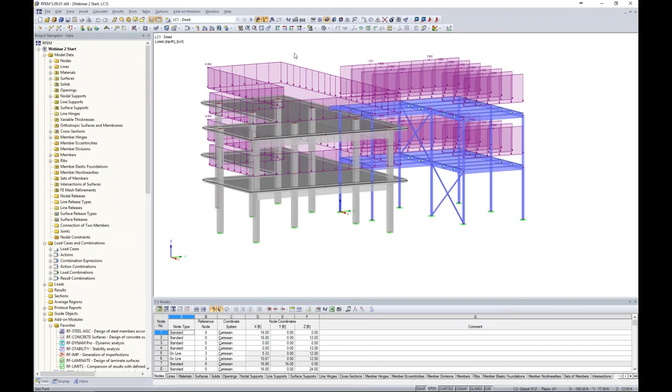Previously we loaded the structure, ran our load combinations, and got a full analysis. Now that isn't always the case. Sometimes we go to run an analysis after we have loaded our structure, and for example here we have loaded our structure with dead load. Previously everything ran great, but as we know with any finite element software, that doesn't always happen. So when we go to run this first load case, as we know from RFEM Webinar 1, this is running according to a linear analysis, and we immediately get an instability.

Instabilities are nothing new despite what program you're using, but I want to show you these features that make our lives a little bit easier within RFEM. The first thing to know is the text about the specific instability. It says this model is unstable. The instability is found at FE node number 64, direction Z. So it immediately gives me a location and tells me that there's some type of issue in the global vertical direction.

The model is statically underdetermined. So when I close out of this error message, you'll see that my big red arrow shows me exactly where FE node number 64 occurs.

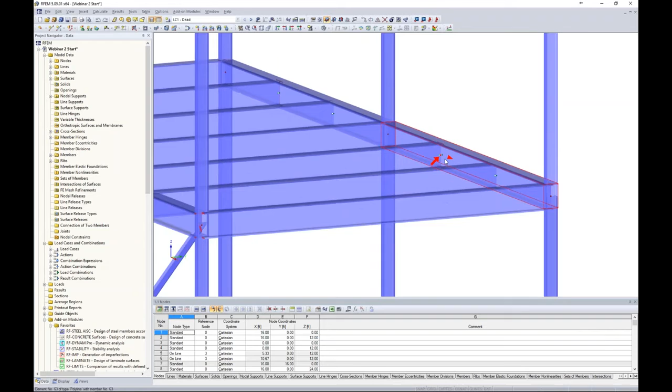Now, I'm not going to say that 100% of the time this big red arrow is going to point out our issue, but a lot of the time this really is where the issue is occurring. So when I scroll in here, I really don't see anything immediately. When I turn it to a wireframe model, okay, well, I can zoom in here and see that I forgot to connect my node here of my beam to my transverse beam.

Well, that's no problem at all. I can just easily drag and drop that to connect those two members. So you can imagine that when we have a huge model with a lot of members and we get this error message for an instability, that red arrow is a huge benefit to really narrow down on where that issue is occurring, rather than it being like hunting for a needle in a haystack, trying to determine maybe if a node isn't connected someplace.

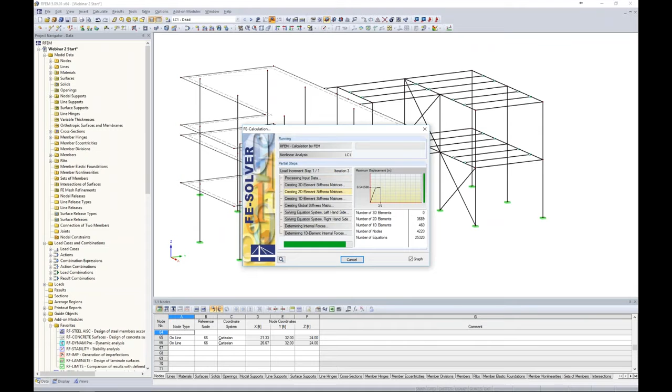So now we can go and run our load combination again, or this particular load case. We run it, and everything appears to run okay this time. We immediately get our deflections here, which we can decrease the deformation factor.

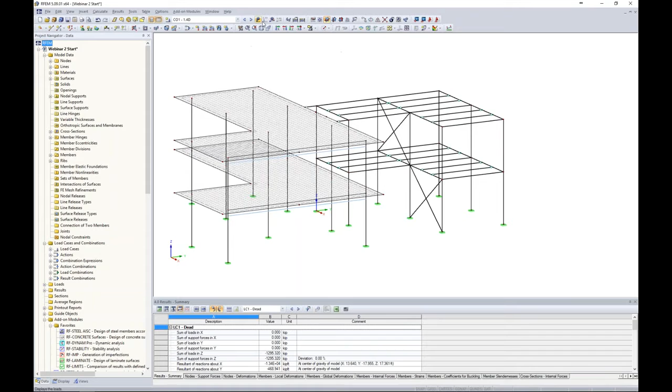So that's great, but now we need to run our first load combination, 1.4 dead load. This is just a load combination from ASCE 7. I take a look at my applied loads - it's applying that 1.4 factor to all of my dead loads, our surface loads and line loads here. Maybe turning this back into the rendered view, I begin my first load combination analysis.

And lo and behold, we get another error message. So it's another instability, but this time our text is a little bit different. It says our model is unstable and the instability is found at this location, direction X. So we have a little bit of a different direction that it's being affected now.

But this says a specified load is greater than the critical load. So this tells me that at this particular location I probably have some type of issue with buckling, because the specified load is greater than the critical load.

Well, I can close out of this error message and zoom into this big red arrow here. Maybe I turn this into wireframe. I see that everything is connecting fine, so I don't really understand where this error message could be coming from.

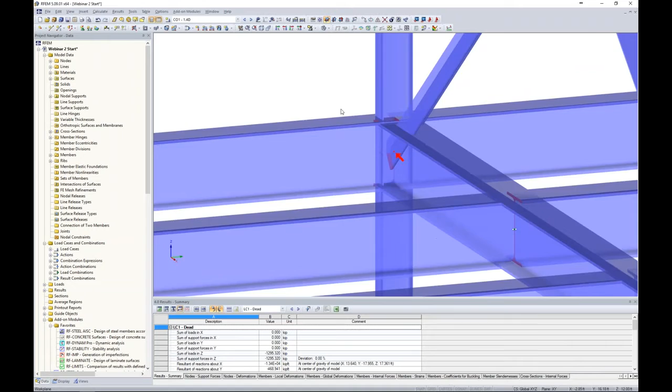Well, this is where we can utilize our add-on module, RF Stability. So from our long list of add-on modules over here on the left in our project navigator, we can launch RF Stability. As you can see, this is just a simple dialog box that pops up within the program, and it allows us to do an eigenvalue analysis for a few different eigenvalues based on the buckling behavior of our structure.

And what we can do is import different axial forces from either load cases or combinations. Now, because I was able to solve for my first load case, dead load, just fine, it makes sense to import in those axial loads to see how the structure is behaving based on those applied axial forces.

Now, we have quite a few other settings here that I won't get into in too much detail, but we do have an option down here that I can calculate an eigenvector for an unstable model. So this is if I couldn't get the model to solve at all, so that the causes of the instability can be checked graphically. This is a feature too if we couldn't even get our dead load to solve.

Now for this, I will run the calculation, and it quickly runs the different 4 eigenvalues. And I'll now see my results available in my tables here. So you'll see I have 2 different columns - the first is the critical load factor.

Now the critical load factor is just a factor that I can multiply that applied dead load by before I'm going to see the associated buckling behavior. We have 4 different eigenvalues, so the critical load factors are listed here in ascending order. So probably our most important one would be this first eigenvalue.

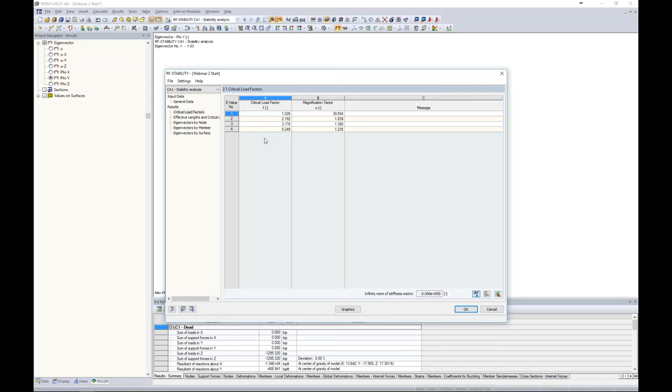So if I take a look at my graphics, you can see we're still in this add-on module RF Stability. We can see that with our drop-down box here, and I have my 4 different eigenvectors. Looking at the first eigenvector, we can see the buckling behavior of this structure.

Remember, I can only multiply my dead loads by 1.03 before I'm seeing this type of behavior. If I take a look at the other eigenvectors, same type of behavior. It all has to do with these slender columns here. So you can imagine that when I multiply my dead load by 1.03, I see this buckling behavior. So when I'm trying to run 1.4 times my dead load, that's where our instability is coming from. These members simply can't handle the applied loads.

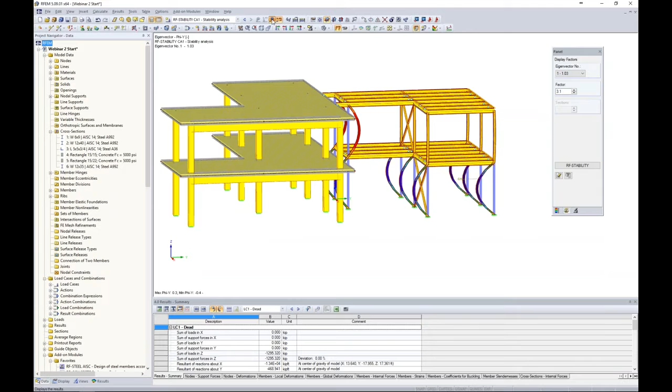So back under my data tab, at the very top is all of my input data. I can take a look at my cross sections, for example, maybe turn off my results here from RF Stability. I click on my first cross section defined. It's a W6x9, that's a very small number. So perhaps I want to increase that to something a little bit larger.

Well, I can just right click and edit all of these cross sections at once because they are assigned to a single cross section within the program. Open up my cross-section database, and here are all of my AISC shapes. So we would like to choose something more like a W10x49, much bigger than a 6x9. Still A992 is okay, but obviously we're going to have a bigger cross-section here. So I click OK, and it's asking me to clear my results.

So now when we go to run our 1.4 dead load, run the analysis, everything should run fine because now we have a little bit more of a sturdier member there and we don't see that same buckling behavior. So you can see how RF Stability is extremely useful, not just if you have an instability, but if you want to see the different buckling modes of your structure. I did a few other webinars where I utilized RF Stability to export as imperfections as well.

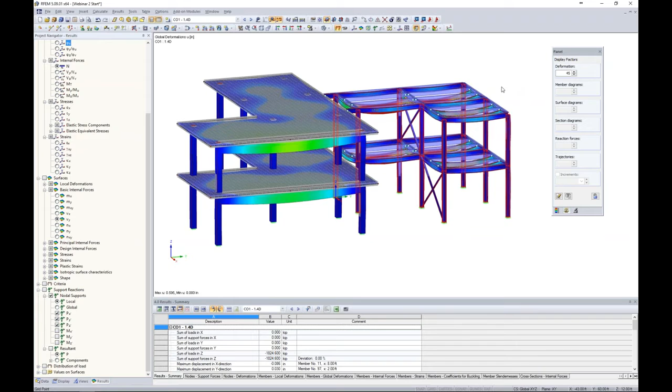Okay, so now that we have addressed instabilities, I'd like to move on to singularities. And the first thing to do is to turn off our results, and let's take a look at our top surface here of our concrete structure.

So if I drag my selection toolbar or selection box over that top surface, I can use my drop-down box here to create a visibility by selected objects. Now you can always right-click and show the hidden objects in the background if you'd like, or you can right-click and turn that off so that we get a clean view of only our structure that we've selected.

Under Views, I can create a new visibility, and we'll call this Top Slab. I click OK, so now I have this user-defined view under Views that I can always refer to despite whatever view I'm currently in. So this is the case when we go to show the hidden objects in the background.

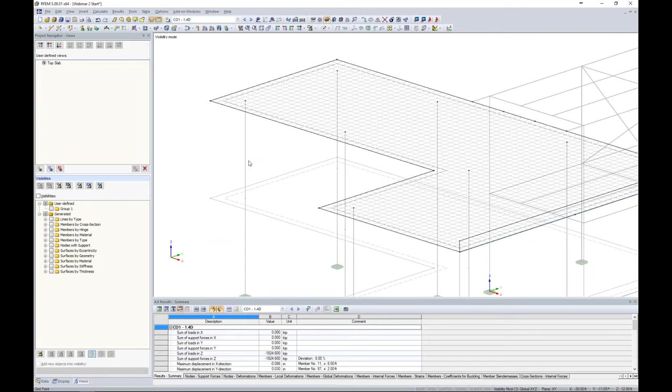And we show a wireframe view, that members are always 1D elements in a finite element software. Now our surfaces are 2D elements. But the problem is that where we intersect this column to the 2D surface, you can see here that the intersection occurs at this teeny tiny FE mesh element right here, the single node point. So we can imagine that all of our force transfer is occurring at this single point.

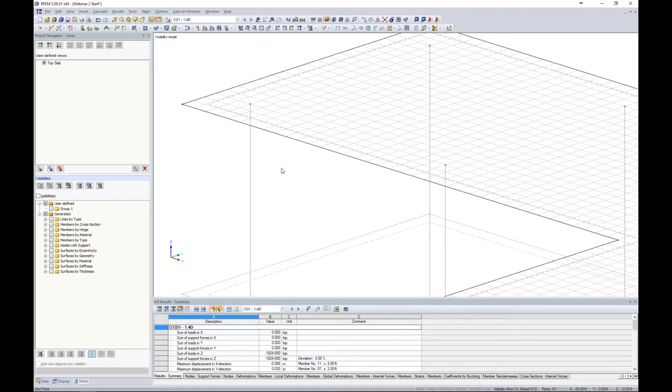So inevitably we're going to get very high stresses, very high forces. If we go to do design of this concrete slab, we're going to get high reinforcement simply because it's a product of the high internal forces at this location. Now in reality, when we render this, these columns are 15 inches by 15 inches, so we are going to get some load distribution. And like I said, this is not just for our program RFEM, this is common in any finite element software. So what tools do we have available in RFEM to help us address this so that we are not overly designing our structure?

Well, the first thing, and what I'm going to do, is to jump to a different model here that I have saved, and I have went ahead and used our add-on module RF Concrete Surfaces to do my reinforcement design. Now I have an entire hour-long webinar dedicated to just surface design using this add-on module, so we won't get into it today. But again, if you are interested in how we can do reinforcement design for this, refer to that YouTube video.

So once we run our analysis in RF concrete surfaces to get design per the ACI, we have our different required reinforcement. The first is AS1 at the top. Now judging by this red arrow, we can see the reinforcement direction, and you'll notice that where these columns are framing into the slab, we have high reinforcement given there. The same goes for AS2 in the other direction.

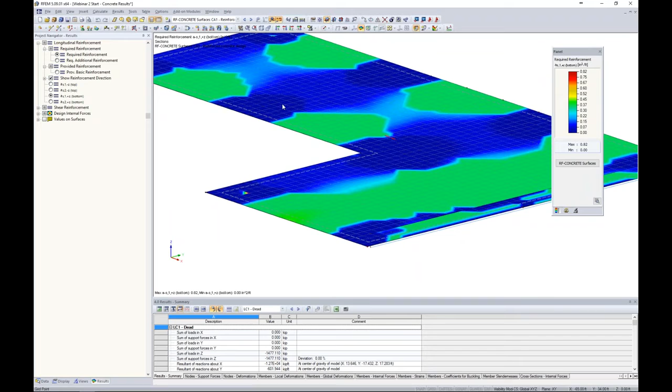Now when we're looking at AS1 at the bottom, it's not the same, which makes sense. We have a lot of bending at the bottom of our slab between our columns, so that's where most of our bottom reinforcement is going to be. Same with AS2 at the bottom in the other direction.

Now focusing on AS1 top for our slab with this particular reinforcement design, this is nice in terms of our contours, but perhaps we'd like to see this in a more numerical value. Well, we can do so with sections, and what we will do with our first section is up here in our dropdown, we can create a new section numerically. But before I do that, right next to it, we have the option to completely turn off our ISO lines. So these results will still be available, but I'm just simply turning off those ISO lines for the sake of making my section cut right down through the center of my slab.

So a section is exactly what you would think of it. It's going to give me the internal forces or my results at that particular location. So we can create this section numerically.

Now the first thing I need to do is to give it a section name, section 1. It will be a section cut through my surface, and I can apply this to my single surface number 2 here by clicking on that graphically.

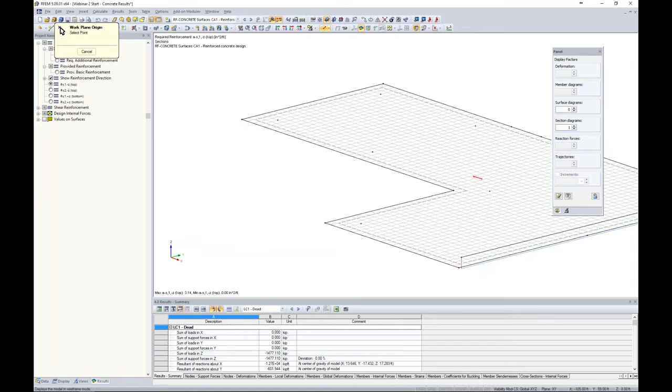The next thing to define is my start and end points for the section. So what I like to do is maybe turn on my drawing grid down here, and I can activate that down at the bottom, change my origin for my drawing grid, and I can choose my 2 points here by zooming in, and I want it right down that column line. So my second point will just be located at the second end of my slab, and because of those AutoCAD-like features, the program does a great job of just snapping to those points that I most likely would want to place my section.

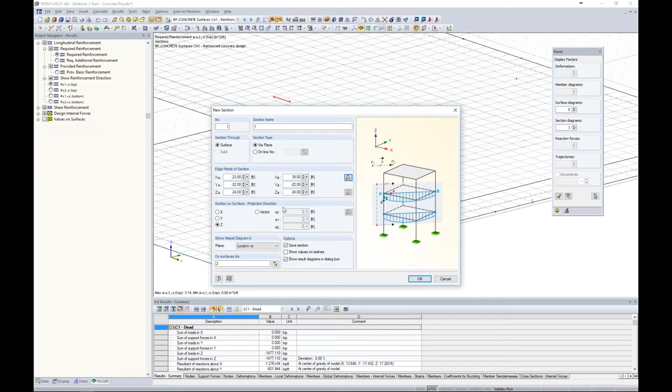Now the section on surface, the projection direction, we can have it in the global X, Y, or Z orientation, or we can define our own vector if we want it at some type of angle.

Once I click OK, then it immediately brings me into the results diagram for my section, and you'll see our exact same results that we were viewing in RFEM, and in particular, we take a look at our reinforcement design per RF concrete surfaces. Here are those spikes in reinforcement where our columns are framing into our surface. I think we can easily say that this is being over-designed for those internal forces.

Now I can always exit out of here and view these surfaces, as you can see graphically on my surface as well. So going back to the results diagram by right-clicking, I want to show you guys a useful feature called smoothing ranges. So up at the top is the option to edit our smoothing ranges.

Now my first column occurs 3 feet from the edge of the slab. My second column occurs at 20 feet from the edge of the slab, and my third at 41 feet. So what I'd like to do is smooth out the range, maybe 1 foot on either side of the column for a 2-foot range there. So this is to account for the load distribution that's occurring when in reality the program's not accounting for that.

So what we can do is define our different ranges. For example, for our first column, the beginning will be 2 feet and the end will be 4 feet. The program automatically calculates the length as a total of 2 feet for that first smoothing range. The second will be from 19 feet to 21 feet. And lastly, for our third column, it will be from 40 to 42 feet.

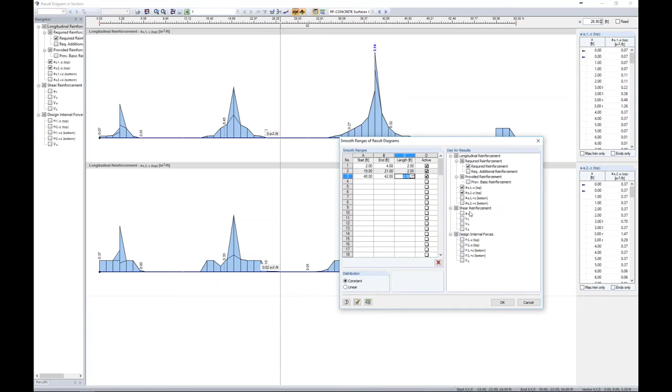The program automatically assumes that we'd like to apply these smoothing ranges to what we're currently looking at, but we can always activate and deactivate different results available here. So now when I click OK, you can see the smoothing range applied.

For example, column number 3, we went from 3.14 inches squared per foot to 1.65 inches squared per foot. So this is extremely useful in the sense that we can print this to our printout report.

We can even use this drop-down box here and pull up one of our other load combinations. I'm going to clear out all of these result diagrams and just activate my MX and MY. Again, we're seeing those spikes in internal forces here. I can go back to my smoothing ranges and simply activate the checkbox for MX and MY for all 3 of these ranges, so now when I click OK, you're going to see the smoothing range applied here as well.

Now, one thing to note, if we jump back to RF Concrete Surfaces, for example, the smoothing ranges are shown here, but if I were to exit out, they are not shown graphically here within the model.

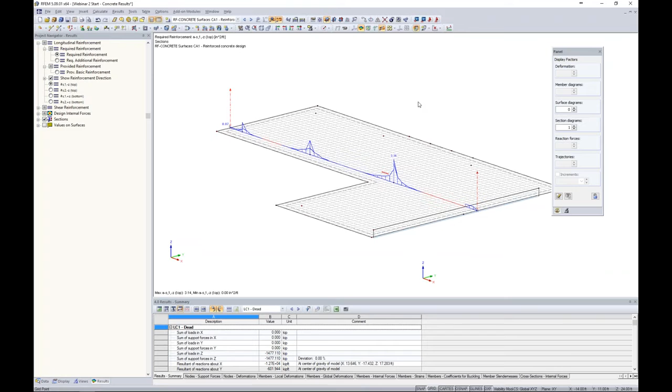So the question is, well, that's great, but how can we apply this so that the program actually designs for those average forces, rather than us just putting a fictitious number after our results are shown in the smoothing ranges? And one thing I forgot to mention, if we take this section cut and we highlight it, hold down our control key, maybe we want to copy it down this other column line just to give us some perspective on some high design forces at this location.

So smoothing ranges are great, but if we go back to our Data tab, we will see these sections available here. We have section 1 that we just created, and then here's our second copied section. There's another feature called average regions.

So if I right click, I can create a new average region. Now for this, we want to apply it to a particular surface, so I graphically select surface number 2 here. You'll notice that I have 3 different forms that I can select for my average region: a rectangle, a circle, or an ellipse. For our particular case, our columns are rectangular in shape, so it's probably most beneficial to use a rectangular averaging region. But maybe you have a circular column framing into this slab, so that can be utilized as well.

The next thing we want to do is to define where we want to apply the center of the averaging region. We'll apply it to our first column here. The dimensions, if we want to average it out over a 2-foot section again, for both our A and B dimensions shown in this picture, we can.

Now you have a lot of control on what internal forces you exactly want to average. The program assumes that for the local axes of our average region, U and V, we want to correlate those with the X and Y local axes of our surface. But in reality, we can activate all 4 of these if we just want to average out everything together, independent of what our local axes are doing. Or if we're interested in maybe just averaging out our moments, but not our shear and axial forces, we can individually apply those as well.

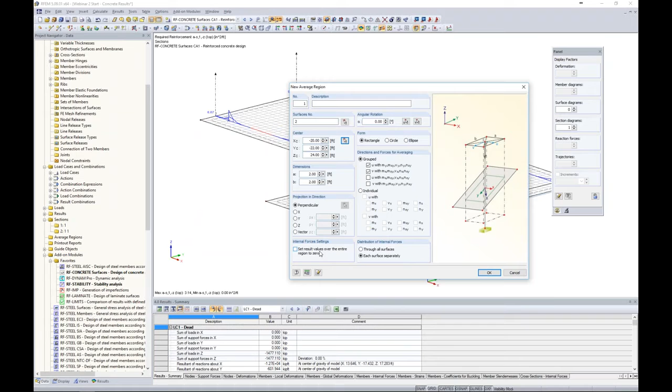The internal force settings - you even have the ability to set all the result values over the entire region to 0. This might be beneficial if we're checking punching shear for a column and we're really interested in the shear at the critical shear section, and we don't want to design for anything within that critical shear section.

So if we click OK, then we will get our first average region. Now, to make this very clear what we're doing, I'm going to jump to one of these particular load combinations, and under my results, I'm going to activate my sections. So we're still viewing our sections here, but for my MX forces - this isn't my concrete design now, this is my internal forces MX.

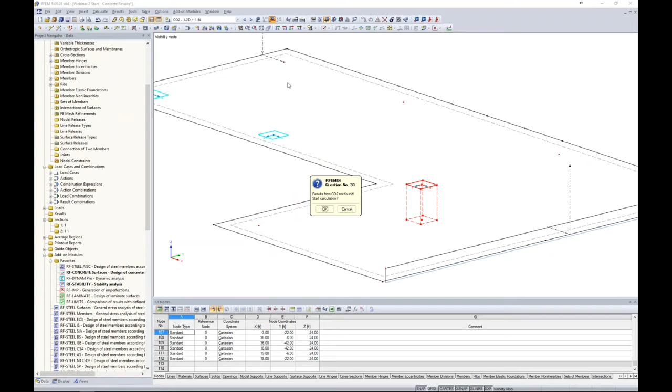Now with this average region, all I have to do is select it, hold down my control key, and then I can take it, drag it, and drop it. It's asking me to clear my results, that's fine, and I drag and drop it to some other regions here. Now I can rerun that same load combination rather quickly here, and we will see that average region now applied. Previously this was something like 83 kips per foot, so you can understand that this is now going to give us less internal forces.

Now if we jump back to RF concrete surfaces, it looks like we lost our results here, so I'll quickly rerun that. All this is doing is applying the ultimate limit state designs for all of my load combinations to do my reinforcement design. But what I want to show you with these average regions is that my AS1 top is still showing 3.16 inches squared per foot, so this average region did absolutely nothing to help us with that.

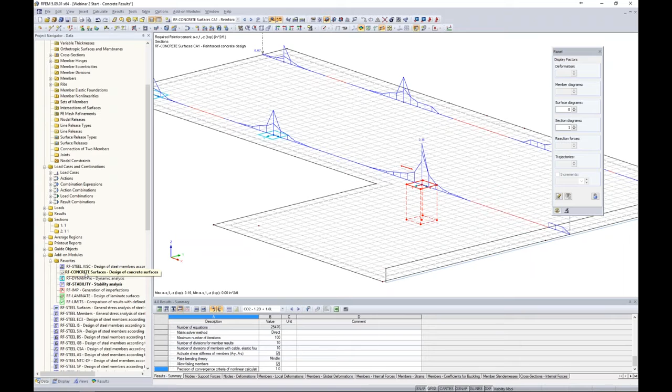So why is that? Well, back under the Data tab, under the Concrete Surfaces add-on module. Again, if you want a more detailed look into this particular add-on module, refer to our previously recorded webinar. But to let you know, when you are using average regions for concrete design, under the Details tab, it is default to have this option checked off.

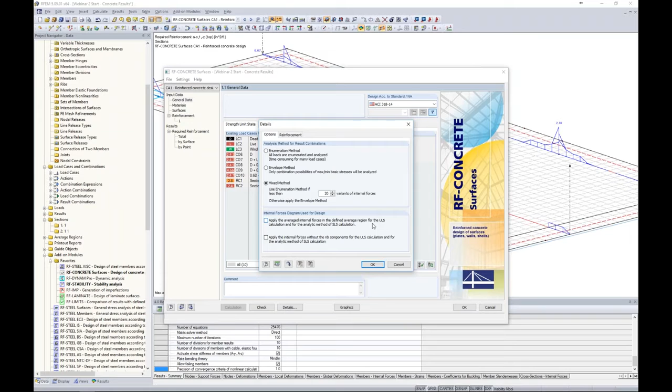What we'd like to do is apply the average internal forces for our ultimate and serviceability limit state designs, so now we check this checkbox. I click OK, I click OK. We've lost our results again, but we can easily run a quick analysis, which solves rather quickly, because now it's taking those average internal forces to give us our reinforcement design. So now we have gone from 3.14 to 1.83. This is how we can apply average regions to address singularities within the program, especially for something like concrete design.

Okay, so that is what I wanted to look at in terms of singularities. Now, switching topics, I'm going to cancel my visibility mode here and render my model.

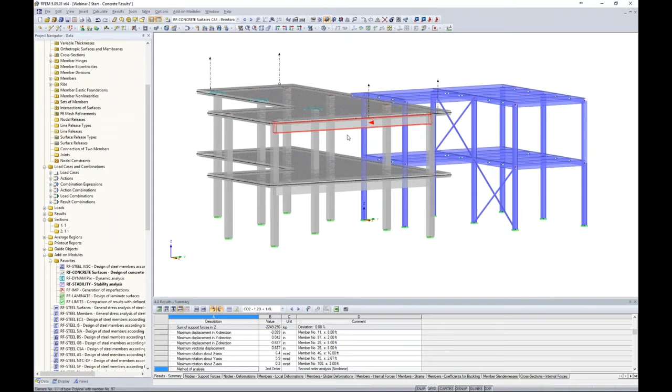In RFEM Webinar 1, if you remember, we created this beam member here, and it's actually a rib because we wanted to span from this column to this column, but we didn't have an intermediate column, so we thought it'd be best to apply a rib member there. If I double click on this rib member, you can see the member type is set to that. Previously we had defined effective widths for this rib member to take that into account for analysis, but also designed for our reinforcement per the ACI.

Now let's say we have a situation where we actually have a precast element, and the precast slab is sitting on this precast beam, and it's not a monolithic pour like what we'd see with a rib type member. In reality, I want to fully release the moment. Maybe I still have resistance for my lateral movement and of course my vertical movement, so X, Y, and Z is fixed, but no moment will be transferred between the two.

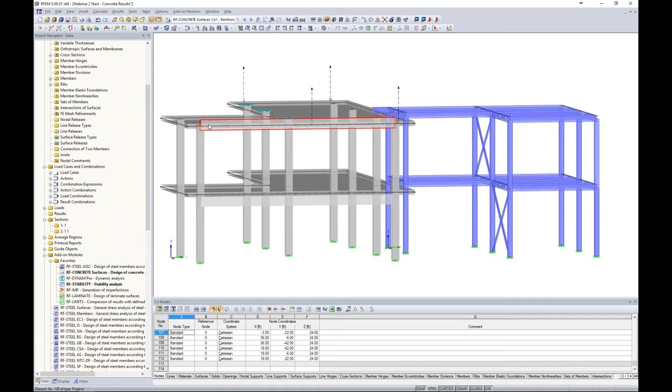So what I'd like to do is not have this set as a rib, but set this to a beam member. When I click OK and it's asking me to clear my results, I take a look. My typical member is modeled directly at the center line, the same center line as the slab. But in reality, I'd like to still drop this beam down below the surface. So how can I apply an eccentricity?

Well, if I double click this member, we have a tab here called Options, and that's where you'll see member eccentricity. Now we need to define a new member eccentricity. You'll see here that we have not only the local axis system X, Y, and Z for a member, we can also set it according to the global X, Y, and Z. The local might come in handy because if we are modeling a member at an angle, then obviously we want to apply the eccentricity according to the local axes rather than the global.

Now we also can apply this movement of the beam in the X, Y, and Z, so not necessarily just vertical eccentricities, but left and right too. Typically with this situation, I would need to understand what's half the depth of my slab, what's half the depth of my beam, add those together, and manually apply my eccentricity. But we have automatic features in the program that can do all of that for us. You can see here I have 6 different options of where I can select my beam to be, for the eccentricity to be applied to. This little red dot highlights exactly which option I've selected here.

So I'd like the top of my beam, and I want to offset it according to a surface. Then I can graphically select my surface number 2 here, and I want to offset it from the bottom of that slab. So now when I click OK through all these dialog boxes, we can see that beam was dropped down below the bottom of the slab. Now this is the same concept as the rib member, but now we're not taking into account that effective width.

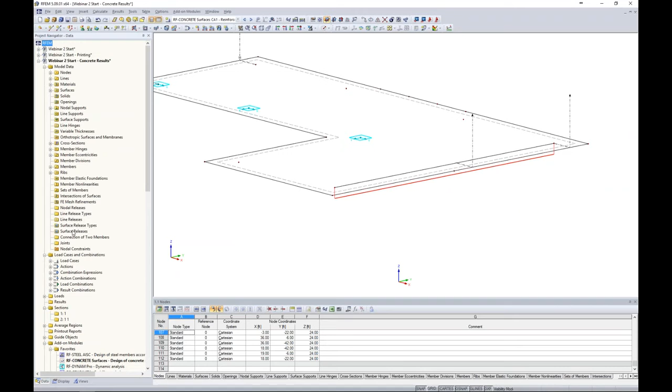Well, in the program, we have a feature under data - if I scroll up to my input data here, you'll see a line release. So what I can do is right-click to apply a new line release. The first thing the program asks me to do is define the line, and I apply the line I used to create the member. If I try to click the member itself, it doesn't allow me to do that, because in reality that's not where the member was modeled - it was applied to this line integrated within the surface. Then we create a line release type.

With a line release, we have the ability to apply releases in the translation directions X, Y, and Z. You can see we also have partial fixities here, so maybe we don't have a full release or full connection, but we can apply that partial fixity spring constant, and we can get into things like nonlinearities. Nonlinearities might be very important for something like friction - if we choose one of the friction options, we have different settings based on friction coefficients that allow us to emulate that same connection type.

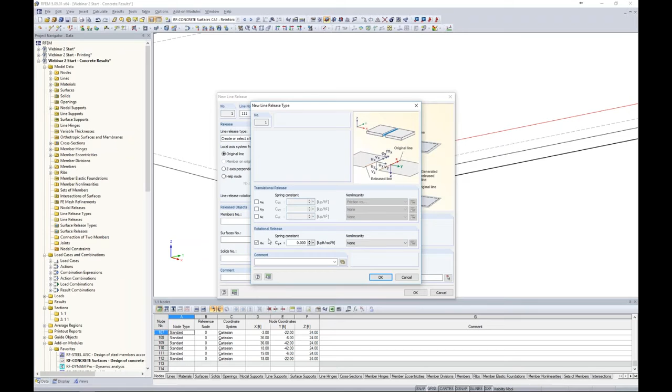Keep in mind these are the local axes of the original line - surfaces have their own local axes, our beam has its own local axes, and so do our lines. So we're not releasing any of the translation or rotation directions of the beams or surface, but rather the line itself. We're going to completely release this rotational release, phi x here, and click OK. We do need to define the released objects - we'll apply this to our surface number 2 again, press OK, and we'll see the setting within the program showing we have some type of line release here, judging by this blue symbol.

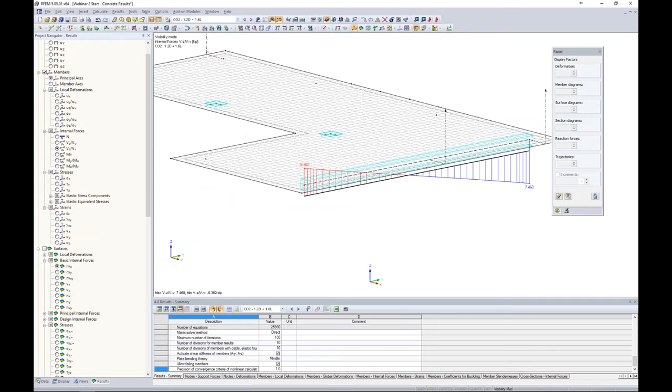So now if I run one of my applied load combinations, such as 1.2 dead, 1.6 - we can run this load combination, and again we're just viewing our initial view here. I'm going to turn off my surfaces, and we just want to take a look at our member design. I'm going to turn off my sections, and we're taking a look at our members and internal forces for torsion. You can see here that we still have a small amount of torsion along the member length of 1.933 kips per foot.

So this is how we can effectively apply line releases in the program if, for example, we did not want to connect our surface to our beam element.

Changing topics once again, I want to move on to result beams. For this, I am going to cancel out my visibility mode here. Let's render our model.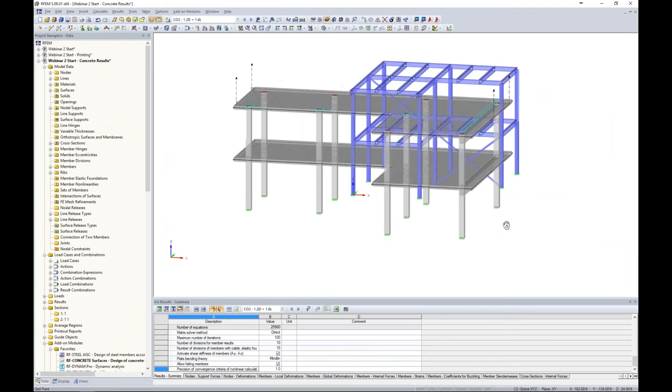So let's say that I'm interested in only my concrete structure here. I'm not so interested in my steel structure, and in particular, I want to know what the story shear forces are. Again, I don't want to incorporate the steel beams, just the concrete surfaces and members. So how do I easily pull that information from the program? This is where something like a result beam will come in handy.

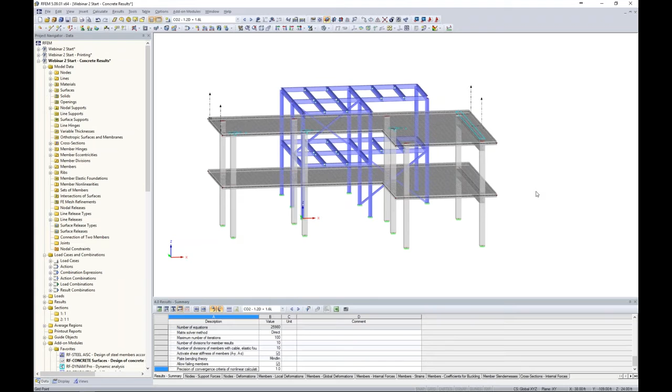So what I'm going to do is first create a new user-defined view here, using my drop-down box, visibility by selected objects. Keep in mind that behind the scenes, when I show my hidden objects in the background, this steel section is still here.

So under my views, I can create this new user-defined view. We'll call this one concrete structure only. I click OK. And I'm going to turn back on my grid. I'm going to redefine the origin at the base of my structure.

I'm going to hold down my control key to select these two members, and once again holding down my control key, I'm going to copy these, drag and drop them to a location parallel to the concrete structure.

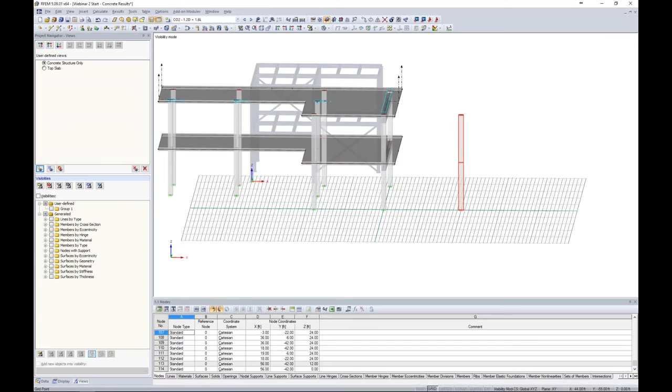So what I'd like to do from here is to select these two members, right-click to edit them. And under the member type is where we can choose result beam. Now, a result beam is simply going to take the information from other objects in the model and apply it so that we can view the analysis results as a member internal force.

Now, result beams don't add to the stiffness of our structure. We're not applying them to an analysis. It's just simply a different way to view our results.

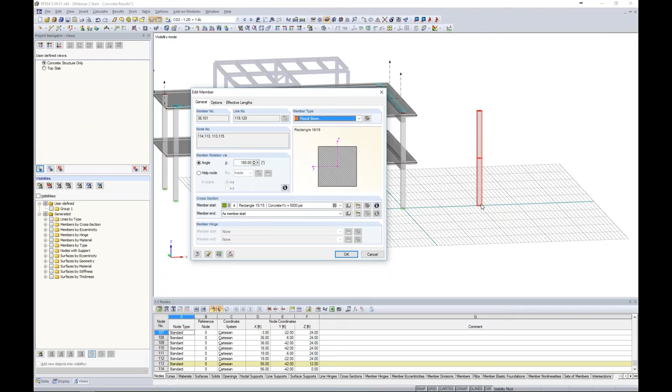So as far as a cross section, it doesn't matter if it's concrete, steel, aluminum, or your own user-defined section - you can choose anything here. You'll also notice I don't even need to put a support at the base of this column section. What I need to do here is to define some additional information.

Now, as far as result beams, we have 4 different options. The first is within a cuboid quadratic. This is going to use a quadratic integration area where the centroid of all of the elements that I'm trying to incorporate within this result beam needs to be located within the member's axis. By member's axis, I mean the axes of our actual result beam shown here.

So I'm not going to use this option today, but we will be using this second option as our second example today - this is within a cuboid general. What this will do is it will apply a rectangular integration area where the centroid can vary according to the local axes of our member.

The third option we have is within a cylinder, so this will use a circular integration area where the centroid must be located at the member's axis. Again, this is clarified here with this nice picture that we have. The last option is to choose from listed including objects.

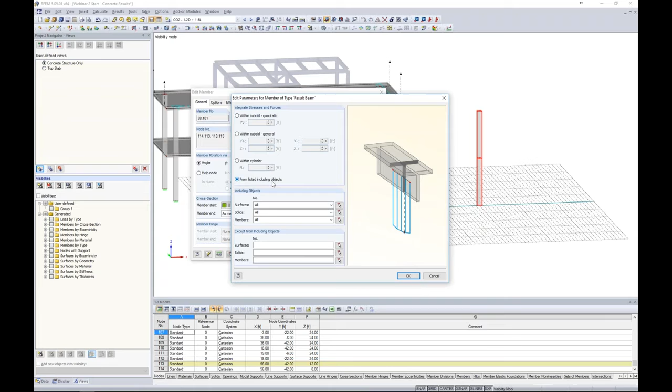So here is where I'm going to start off with my first example of a result beam. What I want to do is select my surfaces that I'd like to apply to this result beam, so I can just highlight everything. Remember, my steel is in the background, but because it's not selected, I don't have to worry about selecting anything from there.

As far as solids, we don't have any, so we can leave this either as all or none. And for members, we want to graphically select all of our concrete members here. I click OK. We can even exclude any objects from our selection if we'd like to here. I click OK, I click OK.

Now I'm going to run one of our load combinations where I have a lateral load applied. You can remember from webinar 1, we applied a wind load in the Y direction here with some gravity loads. So if I run this first load combination...

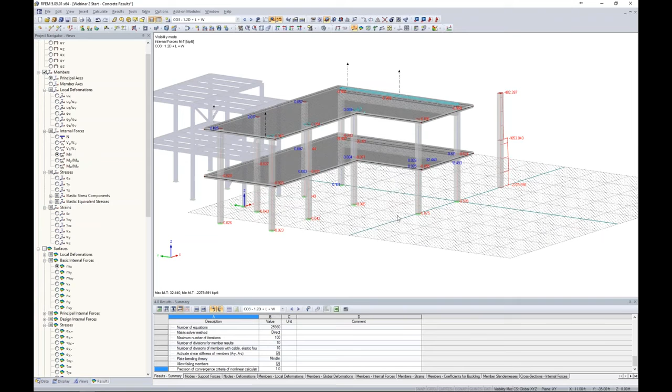...then you will notice that after the result is complete, I have my member over here with some results as well. So what's exactly happening? Well, I want to view my results on my members like I would any other member within the model.

What this is doing is incorporating all of my objects here and applying it to my result beam. Just to summarize what's exactly going on.

So as far as viewing my shear forces in the Y direction, this is the local Y direction. I can always right click and turn on the local axes of my members to understand exactly which direction I'm looking at. The local Y gives us our story shear information. For example, the top story is 10.46 kips for this particular load combination. My first story shear is 39 minus the 10, and finally I have my base shear given here at 48 kips.

If we take a look at our shear in the other direction, we hardly have any forces at all. That's just because we haven't applied any lateral loads to this.

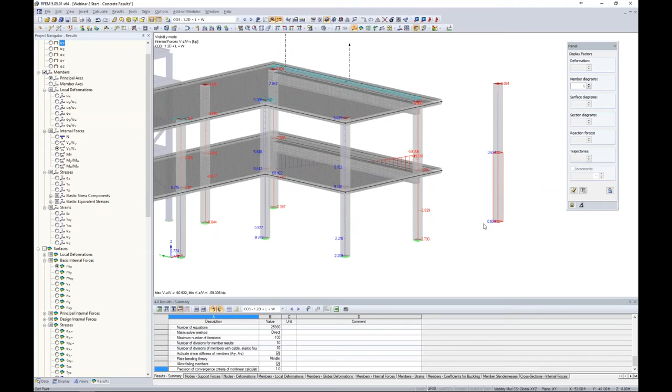Now lastly, we can even take a look at our axial load. So why would our axial loads be important? Well, if we're interested in the sum of our forces, I can see that for my concrete structure only, the sum of my forces in my Z direction is 1,455 kips. Now this is different from the table down here shown in my results summary, which also gives you the sum of the loads in the Z direction, but this is for the entire structure, including the steel structure over here. So again, result beam would be beneficial for only part of your structure.

Now, the moments are not applicable in this case, and that is because we have moved the members of this result beam away from the centroid of the objects that we're interested in. So just keep that in mind when we're looking at something like moments - we can't get an accurate representation here. I'll show you in just a minute how we can do so.

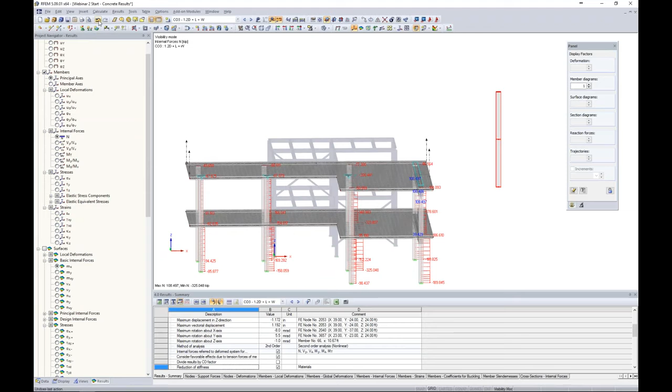Now, as we just saw with the axial and shear forces, the parallel distance from the centroid does not matter. So going back to RFEM, I can move this result beam every which way in the left and right direction. But if you take a look at what happens when I simply move it in the vertical direction, those results are now gone. That's because I did not move it in a parallel direction to the objects that I'm interested in. So that's the one way you need to make sure you're able to see your results accurately for your structures - make sure it is parallel.

Going back to the PowerPoint, now our moments - which I just mentioned, torsion, strong and weak axis bending - the beam must be placed at the centroid.

So let's move on to a quick second example with our result beams of how we can utilize this to view our moments. For example, if I'm interested in my top slab here, which we can go back to our user-defined views, I really want to design a 4-foot wide section on my slab, and I want to pull those internal forces from that 4-foot wide section. Well, a section cut isn't going to work here because a section cut only gives me my internal forces at that exact location - exactly what it is, it's a cut. So in order to utilize a 4-foot section and pull those internal forces, we want to use a result beam.

So what we can do is create a new beam member here, and instead of the member type beam, we will choose result beam.

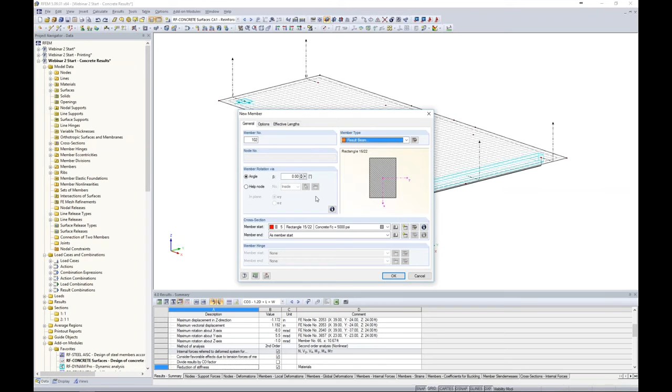And again, the cross section does not matter. We could choose anything that we like because we're not contributing to the stiffness of the structure in any way.

We want to move on to the details of this result beam, and this time I want to choose within a cuboid. So if I'm interested in a 4-foot section, that means I want to choose 2 feet on either side of my result beam, which is laid out quite clearly within this picture here.

As far as my vertical direction, this isn't as important because I don't have any members modeled above or below. I'm only interested in this slab, so 1 foot is more than enough to take that into account. But if I had any elements within this 2-foot vertical section, they would also be included in my results, so just keep that in mind.

This list is no longer relevant because I'm using only this section up here. So when I click OK, I can begin modeling my new member. I will snap to the middle point of this line over here to make my result beam section right down the middle of this slab. You can see the program automatically snaps to the perpendicular section, just like what we'd see in AutoCAD.

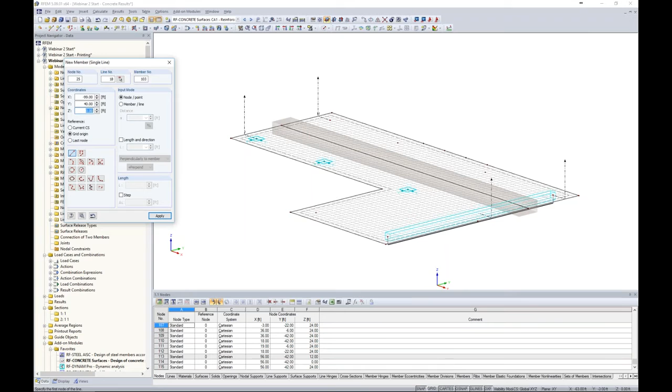And here is my result beam. So we can see that 4-foot wide section. We can even render this if we'd like a little bit clearer view on what's exactly going on.

Now when we take a look at our results, I will run one of my load cases here, it doesn't matter, 1.2 dead, 1.6 live. I'm going to run the analysis.

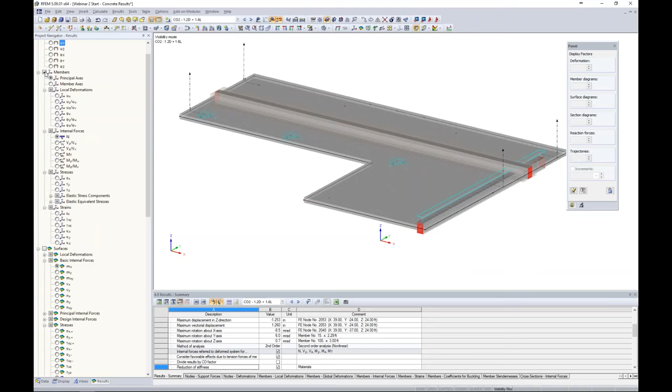As far as our result beams, we can view them as we would any other member, as I mentioned before. So the first thing we want to do is take a look at our member internal forces, and perhaps we're interested in the moment.

So let me turn this to wireframe view. Now, our moments have a nice smooth diagram for my beam member here. So what's going on with this results diagram?

It's pretty choppy. Well, when you're using a result beam like this, under calculate, calculation parameters, we want to change the number of divisions of our members for result diagrams. The default is set to 10. Let's actually change this to something like 100.

I click OK, my results will inevitably be cleared. I quickly run this analysis again, and we'll see that our results look much better. So that can impact the way that you're viewing your results.

So you want to make sure and increase those numbers of sections here if you see any type of discontinuities that we saw with the beam before.

So now we can see that our moment diagram is displayed quite nicely here for our strong axis. Remember, these are the internal forces for our 4-foot wide section, that we can take and go do our own design.

We can take a look at the weak axis bending here. We can even take a look at axial and shear forces. These are all relevant within this particular section.

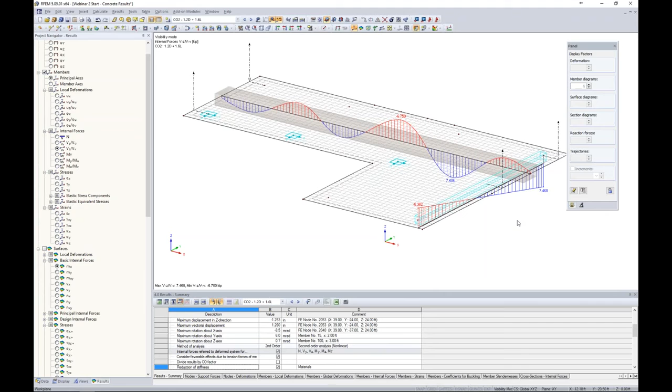But this is what I'm saying when you want to take a look at the internal forces of our moments, that the centroid of our elements that we're interested in must be at the same location as our result beam's axes. So just something to keep in mind there.

Okay, so now that we have seen a little bit more about result beams and we have focused heavily on our concrete structure, let us cancel this visibility mode to take a look at our entire structure. And I'm going to render it.

Maybe I'm interested in the steel structure, and in particular I zoom in here and I want to take a look at this connection here. Now, this connection is pretty straightforward.

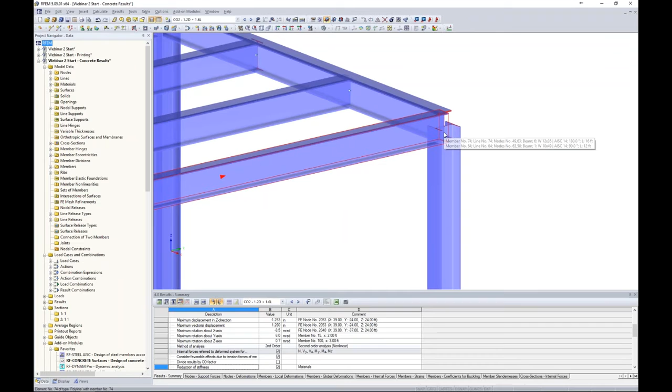We have members framing in at 90 degrees, but if we didn't, let's say we had tapered members, maybe we had members framing in at a weird angle, well, this might flag us to think, okay, well, perhaps we'd like to do a finite element stress analysis for this connection.

But if I turn this into a wireframe view, I cannot do a stress analysis of this connection because all of my members are 1D elements. So we can get stresses along the member length and the member as a whole, but not for this connection.

So what would we like to do about it? Well, the first thing to note is that this member, judging by this big red arrow shown here, the member end is framing into this node.

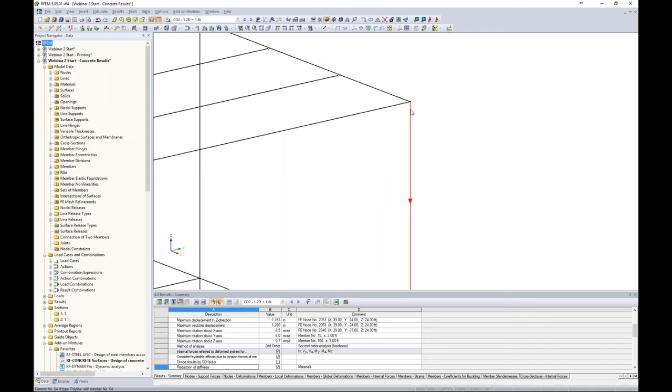The same with this member, but this third member, the member start is framing at that node. So what I can do is just right-click to reverse the member orientation. Now all three of my members will be framing in at this single node.

I'm going to select them all, right-click, and choose to divide the member by a certain distance. Because I switched around the member orientation, the member ends are all located at this particular node, so 3 feet from the member end is where I'm going to divide it. I've done nothing more but just create smaller members out of my initial member length.

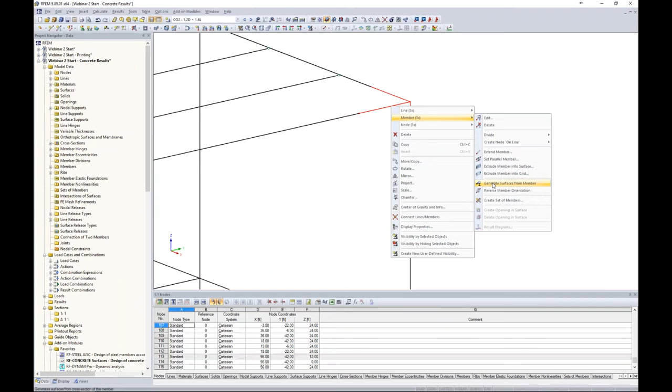Now, if I render this, sure, we get this rendered view of our W section, but turning it back into wireframe view, I'm going to highlight all three of these members, right-click, and under member, choose the option to generate surfaces from members. So now what we've done is taken these 1D member elements and turned them into 2D surface elements, which will allow us to do a stress analysis on this particular connection.

Now, the first thing I want to do is under my display, turn off my FE Mesh Refinements. I'll get into this later.

I wanted to mention that this W shape was previously a W12 by 35. This new W shape here generated by the surfaces has all those exact properties. For example, the web surface here has a thickness of 0.31 - that is taken from the W shape. All of my dimensions, materials, and thicknesses were all taken from that member that was modeled previously, so I don't have to make any changes in regards to that.

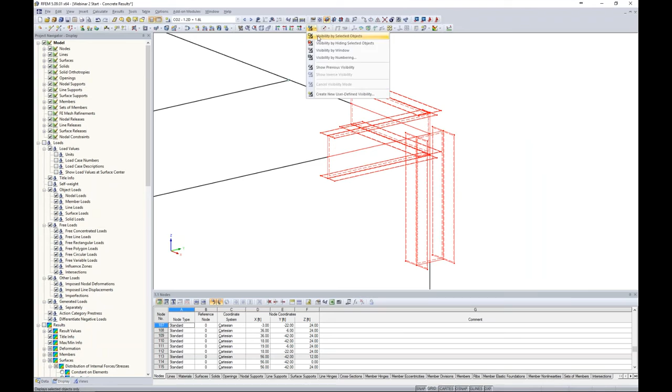What I do need to do is clean up the geometry a little bit before running my analysis. So I can highlight all of my members and create a new visibility by selected objects. Maybe I want to show my hidden objects in the background.

Now this is a nice little trick for even our users of RFEM who've been using the program for a while. If you didn't know, you can select one of these elements here, and if you hold down the Alt key on the keyboard, that will allow you to rotate about those selected elements. Just a nice little feature to utilize there.

Now, to clean up the geometry, I'm going to start by deleting these center lines. They're no longer needed. And you'll see that the column is a little bit low here, so what I'd like to do is extend this up a little bit above my beams here.

So how I can do this is to zoom in here, and I'm going to hold down my control key to select the 6 nodes that comprise the top of my column, and use my move tool. Now I'm only going to move this 0.58 feet in the Z direction, so 7 inches in the Z direction. I click OK. So now you can see that the column was simply moved above those beams.

Now the next thing is to move this beam here on our left to the face of the column. Well, that's pretty easy. If we rotate our model here and zoom in, I can again select these 3 nodes that entail the top of this beam and just drag and drop them to the snap point of the face of that column. Those AutoCAD-like features will allow us to snap to the most important parts of the model.

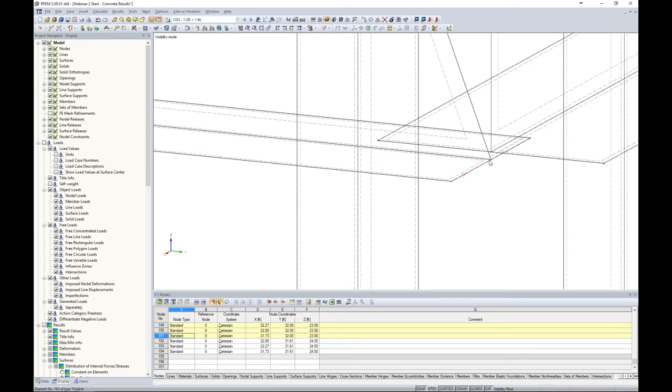Again, I do the same thing for the bottom. I just simply snap to that point, and now I can see that that beam is framing in quite nicely to that column. If I take a look at my rendered view, we can see that here.

Now notice the rendered view of our 1D elements transitions quite nicely to those 2D surface elements. But with that said, if I look at my wireframe view, these 1D member elements are framing into this 2D surface element again at a single FE mesh point.

This is a singularity. Now, by no means do we want to use an average region here, because in reality what's happening is this whole load from this 1D member element should be distributed to the entire face of this beam. So how do we distribute that load? Well, that's where we can apply just our little rigid plate here at the end of our member.

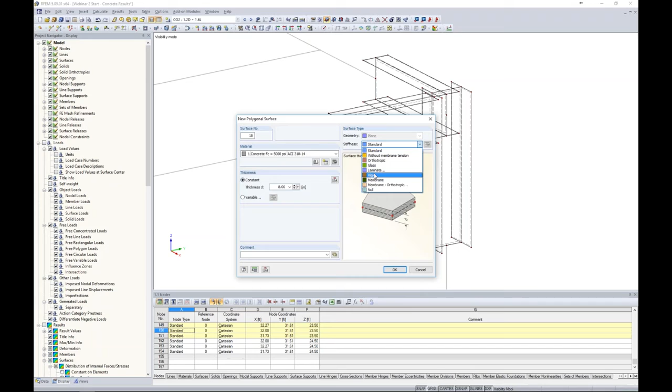Now, under our surfaces in the drop-down box at the top here, we can choose something such as a polygon. As far as the stiffness goes, I want to set this to rigid—pretty high stiffness here, not infinite, but very, very high within the program. I click OK, so then I can draw in this little rigid plate at the end of my member.

Now the same goes for my other beam locations. If I don't take care to draw in this little rigid plate, then I'm going to get singularity issues at all these other locations here. So I'm just snapping to the 4 points of my column. And if I render this, I can see that these plates are shown with the pink color here—that shows me it's a different material.

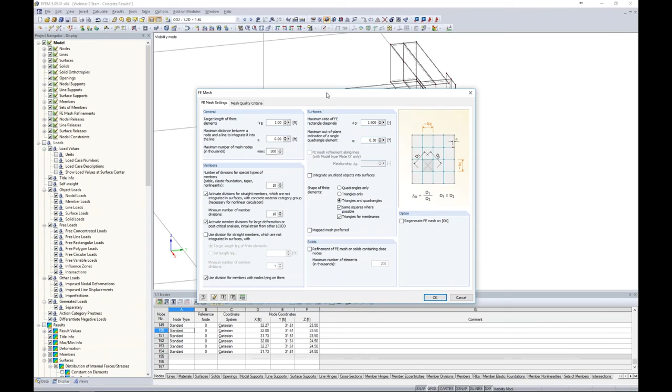Now, a couple other things to take care of before we're ready to run our analysis. Going back to wireframe view, and taking a look under Calculate, FE Mesh settings, we will see here that the global FE Mesh settings are set at 1 foot. Sure, 1 foot is great for our huge slab element of our concrete structure, but when we're looking at something as small as this connection, 1 foot is not ideal. So rather than changing this global setting, when I made that transition to these 2D surface elements, the program actually put in these FE Mesh refinements for me.

That's denoted by this little symbol here. If I double click on it, I can see that the FE Mesh was defined for each individual surface here with a target FE length of 1 inch.

Now this is more beneficial, because if I were to apply 1 inch to my global settings and apply a 1 inch FE Mesh to all my slab surfaces, my solve time is going to be much, much higher. The more FE Mesh elements you have, the longer it's going to take to solve. So it's in your best interest to utilize these FE Mesh refinements for situations such as these, where it requires a smaller mesh here but not anywhere else within the model.

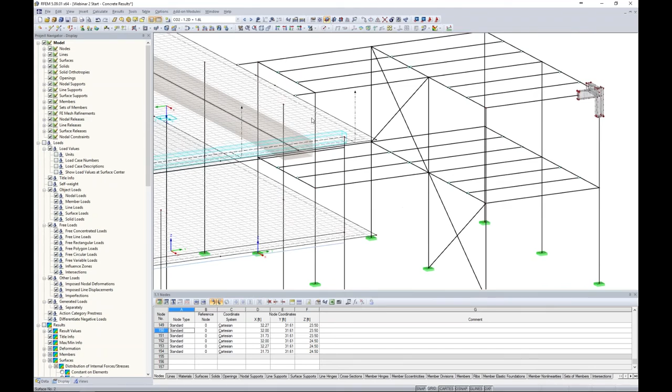So now when I go to Calculate, Generate FE Mesh, and let me cancel out of my visibility mode here, we can see the FE Mesh is automatically generated. Everything ties together quite nicely—I don't have to manually submesh anything here. But when I look at my concrete surface over here, I can see that the FE Mesh is still 1 foot, so that looks great.

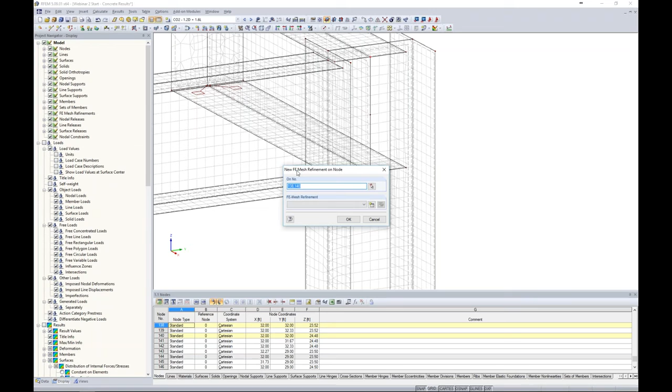Now, keep in mind, we can always apply our own FE Mesh refinements. For example, maybe I have some critical points here where my beam is framing into my web, and I can hold down my control key to select 2 nodes. I can right-click to add an FE Mesh refinement. For this one, I create a new definition type, and we can see here that the node is automatically selected because the program knows that this is what we selected back in RFEM. We can give it a radius of 0.5 feet, or 6 inches.

Maybe our target length for the inner portion of the circle is 0.02, and the outer will transition back to that 1 inch, or 0.08. I click OK, and now the program puts these symbols at those locations for my FE Mesh Refinement. I can go to Calculate, Generate FE Mesh, and now we can see that the program has created this smaller mesh at this particular location, and it transitions nicely back into our surface mesh.

Under the Display tab, we can always turn off these FE Mesh Refinement symbols. The FE Mesh Refinement is still there, but we just don't need to necessarily see those big symbols.

So in regards to our connection type here, originally I modeled this structure so that it has a fully rigid connection of this beam here framing into this column's web. But maybe I go back and decide, actually, I'm going to have some type of weld here, and this weld is not going to have a full moment transfer. So I want to relieve some of those moments within the beam framing into the column web here. So how do I apply that to this connection?

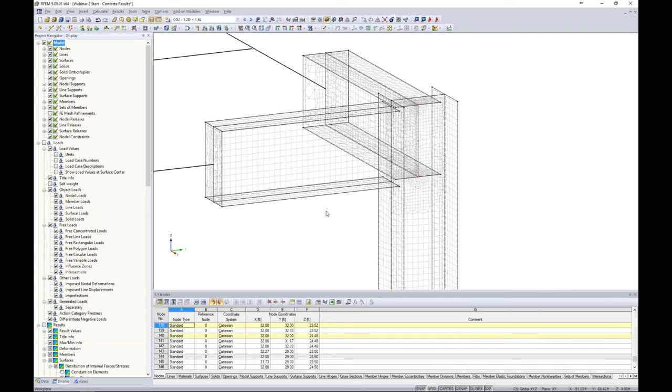Well, that's where we can utilize line releases again. So like I said, we're going to come back and apply line releases on a much smaller level here. Back under the Data tab, under Line Releases, we want to choose the option to assign a new line release graphically. Here, I don't want to override my previous line release type, because this is my beam to slab connection that we talked about earlier.

So what I'm going to do is simply create a new line release type number 2. I want to release this moment, but maybe, like I mentioned, we have some type of partial fixity here with the weld type that we're using. So it might be something more like 40 kips per foot for partial fixity. I can click OK.

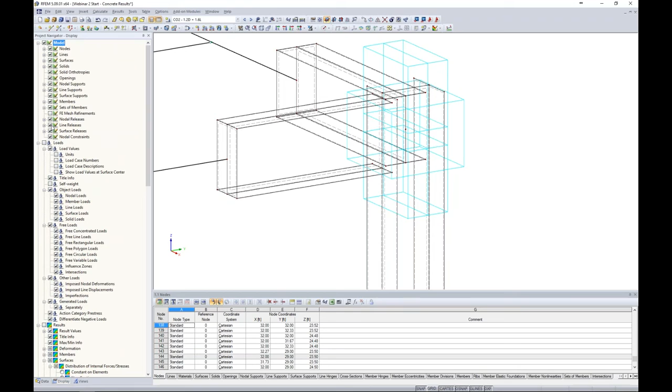The surfaces that I'd like to release these lines from, I select my web element. I click OK. So now when I exit out of this dialog box, I can graphically select these lines of where this beam is framing into this web. So now you can see my symbols showing my line release here, and under the display we can also turn those off if we don't like to see them.

So we're almost ready to run our analysis, but let's take one final look at our applied loads, and we will jump to our dead load here to see our applied loads. Now these are member loads applied in kips per foot along our various steel members here, but we no longer have members, so we lost those applied loads.

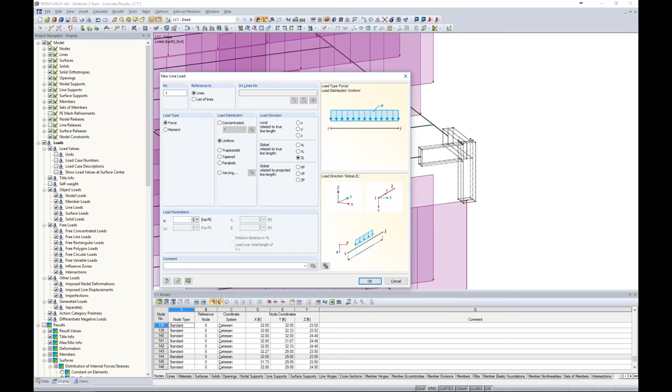Well, in a similar sense, we can apply the same load magnitude, but this time as a new line load. Line loads are applicable for something like a surface, for example, where we don't have a member available. We apply it in the global Z direction with a magnitude of -1.1 kips per foot. I can scroll in here, apply that to the top of this beam, and you can see it transitions quite nicely from our beam to our surface element.

Now the same thing can be done for our live load. We'll apply a new line load here, but this time we want to give it a new load magnitude of 0.3 kips per foot. I click OK, and then I can apply that to the top of this beam.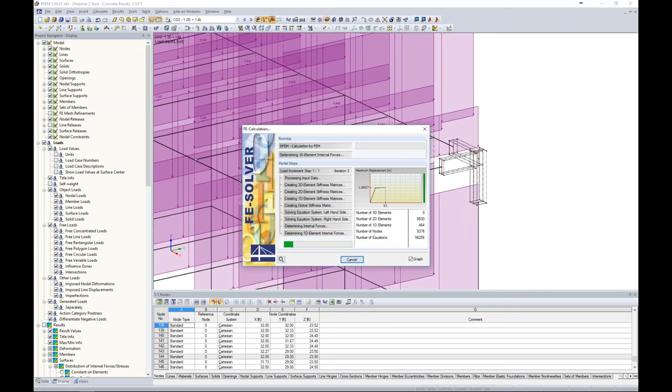So now we can run our first load combination. Here I'll just apply the 1.2 dead plus 1.6 live, and we can run our analysis. Keep in mind this will take just a split second longer because we've now introduced these new finite elements for this connection into the program. As you can see, it still solves rather quick.

We can turn off our loads, and I'm going to actually choose a user-defined section here, visibility by selected objects. Now under my results, I'm probably most interested not in my members, but this time in my surfaces. And under surfaces, we have our von Mises stresses.

So now when I'm taking a look at this particular connection and my von Mises stresses, maybe I select my point here to rotate about that, I have some pretty high stresses here at these critical points. As you can see, 165 KSI.

Now you'll notice that the program is smoothing all of these internal forces together, and that's just so that we can have a nice pretty picture of what's going on with our connection. But in reality, this isn't a correct way to view our results. So it's very important with any finite element software that we pay careful attention to how we're viewing these results, such as stresses on our surface elements.

Now again, with my AISC Advanced Steel Design webinar, I did an entire hour dedicated to a connection just like this, and I go into much more detail, but obviously we're almost out of time today. So the only thing I want to show you is that rather than tying it together with this smoothing algorithm, we'd rather view our results here under our display tab in our project navigator.

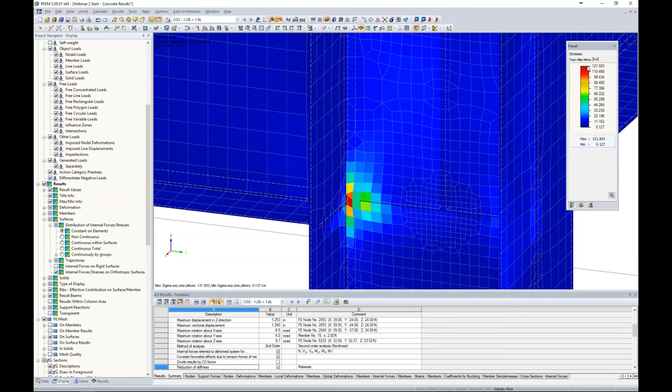Under surfaces, the distribution of internal forces and stresses, we'll view this as constant on elements. So now each particular FE element has its own contour, and we're not trying to tie those together, and our stresses went down from 160 to 121. They're still high, but you can see what a difference that makes.

So now that we still have extremely high stresses, I think we're all in agreement that this is much beyond the yield strength that this connection type can handle. So maybe real quickly, we'd like to utilize the nonlinear capabilities within the program, such as a plastic design.

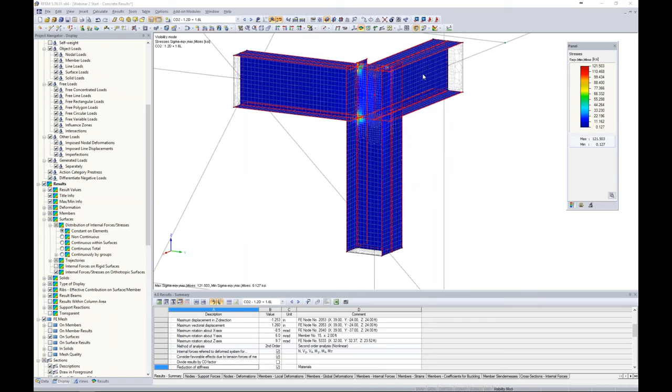So what I can do is select all of my surfaces here, and right-click to edit them. Currently, I'm just using the Steel A992 defined within the program. That's what all my steel members are designed for right now. But I'm going to create a new material.

Again, I'm just going to go to my material database, which we covered in webinar 1. I'll activate my favorites group to select Steel A992. I still want all those same properties, but for my material model I'm going to choose isotropic plastic 2D/3D.

This allows us to do a plastic analysis within the program. We can get into complicated details like tearing and yielding, and we can change our strain hardening modulus. For this example, our yield strength is set to about 50 KSI, with the strain hardening modulus given as shown.

I click OK through these dialog boxes, so now I've changed those surface elements to utilize the isotropic plastic 2D material, but all the rest of my steel elements are still utilizing an isotropic linear elastic material model.

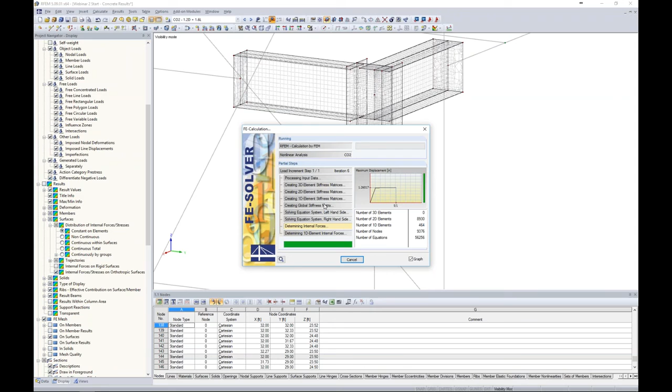So now when I run this exact same load combination, the program applies these loads to each element within the finite element connection, and the minute it reaches the yield strength of 50 KSI, that load is distributed to the adjacent FE mesh elements. It continues until the load has been fully distributed, so in reality we shouldn't see a single FE mesh element higher than 50 KSI.

Taking a look at our stresses, that's exactly what's occurring. The highest stress here is 50 KSI before that load is distributed to an adjacent element.

We can also view under our results tab, since we're running a plastic analysis, an option called criteria. Criteria shows us our nonlinearity rate of a single element, so you can see exactly which elements are in the fully plastic state or have completely yielded.

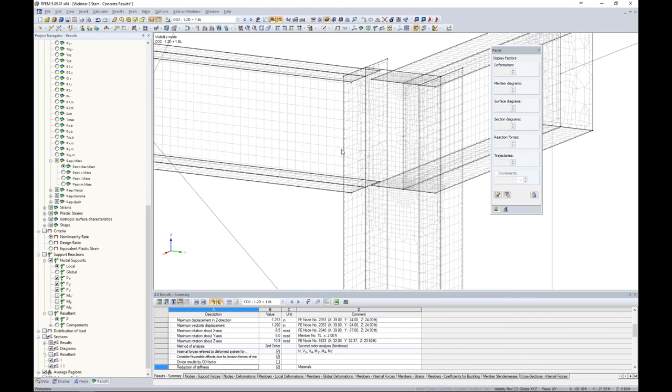Just an interesting topic, and as I mentioned, my advanced steel design course goes into much more detail on this if you're interested in a connection like this.

One more quick topic to cover before ending this webinar is a couple of printout report options. The first, which maybe some people didn't know existed in RFEM, is a 3D PDF. For example, let's say I'm interested in quickly printing off this connection detail to a 3D PDF.

I can either go to File, Print Graphic, or use the quick tool under our toolbar called Print Graphic. We can print directly to a printer, print to our printout report, or print to a 3D PDF.

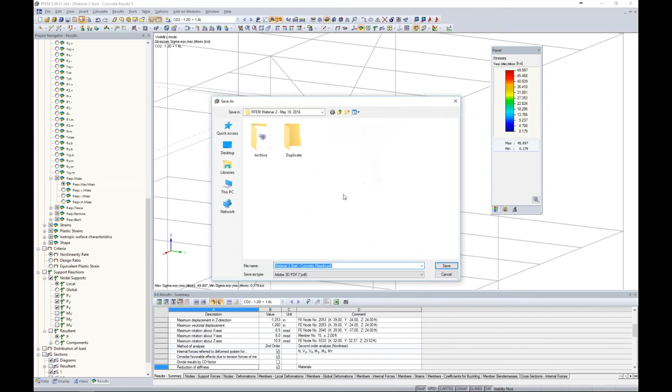When I click OK, it just asks me to save it. I can save it wherever I'd like, and then it will automatically launch this 3D PDF based on my structure.

When we take a look at this 3D PDF, here's our entire structure, and what's great is that we can make changes to our view within the actual PDF Adobe program. We can spin it, for example, to take a look at our connection, and use the pan tool to zoom in and really focus on this connection in particular.

And then we can email it, add it to a printout report, or do whatever we'd like with it.

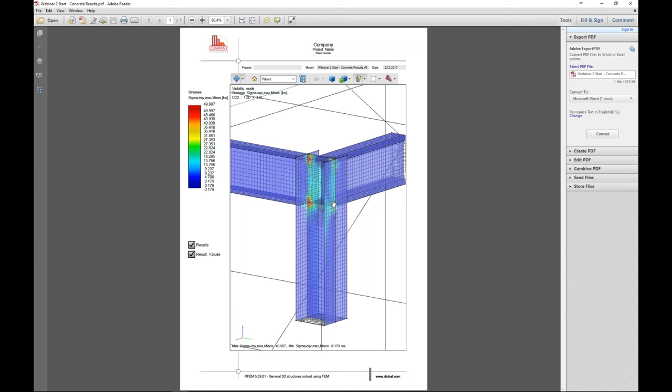Now, the other quick topic is if we're interested in our results and quickly printing off many load combinations at once. I'm going to jump to an already saved model, back to our concrete slab example. Let's say I'm currently looking at the MX forces of my structure, and I want to look at all the different load combinations and print this off directly to my printout report.

Typically I'd have to take a picture of load combination 7, add it to my printout report, change my load combination, take a picture of load combination 8, and add it to the printout report. So what features do we have that make our lives easier?

Under the print graphic report, we have this option called mass print. I'm going to print to our printout report using the full page width, but maybe use 50% of the height to fit a couple of pictures on each page.

Under mass print, this is where all of our model data, loading data, and results data is available. This is basically exactly what we're seeing in our results project navigator. The program assumes we'd like to print off what we're currently viewing, so you can see it's showing MX for my surfaces. Instead of the current load case and combination, I want to print off all load cases and combinations. I click OK, I click OK.

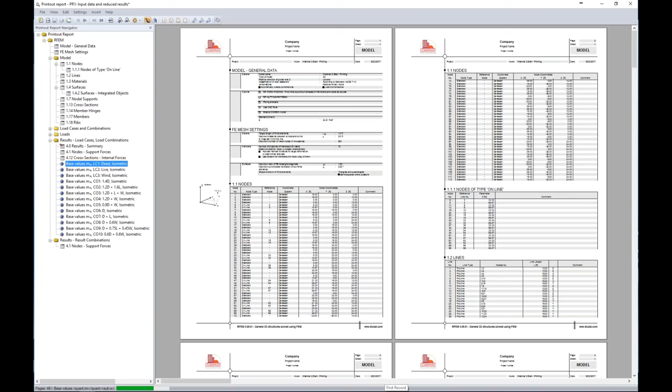Now the program asks me to generate my printout report. I can select one of the saved templates I have. I click OK, and now the program is cycling through all of the different load combinations for my particular MX internal forces of my slab, automatically adding them to my printout report.

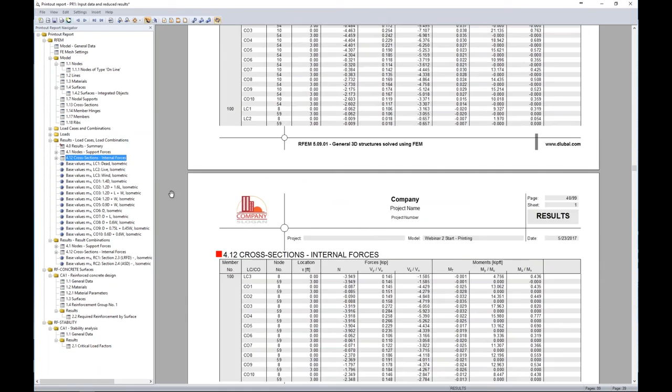Now you can see we jump directly to where those pictures are added. I can zoom in to show you exactly what's going on. Here's load case 1, dead load, and my applicable MX forces. Load case 2, we can get into load combination 1, load combination 2, and so forth. This can be extremely valuable if we're trying to quickly print off a lot of different load cases or results at once. We can automatically do that.

Keep in mind, you can always right click to edit one of these pictures. If, for example, I don't want to see the FE mesh settings, I can go under display, scroll down to FE mesh, turn that off, click back, and now that picture I just edited is automatically updated to not show the FE mesh.

Another very powerful feature: if I make any changes to this model, including different loads or different cross sections, all of these pictures will update automatically, so I never have to worry about reprinting all of these pictures.

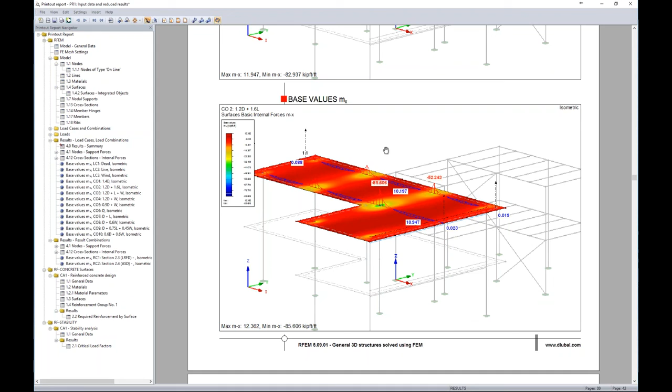I think our printout report is one of the stronger features of our program, especially in comparison to what you might be currently using. You can always add your company logo and company header, and you'll see all of the add-on modules are added to the printout report as well.

If we wanted to switch the order of these, remember running RF Stability at the beginning of the webinar, if we wanted RF Stability in our printout report before our design of RF concrete surfaces, all I have to do is select it and drag and drop it, and the program will automatically update the printout report to put RF Stability before RF concrete surfaces. Just a very powerful feature in terms of our printout report.